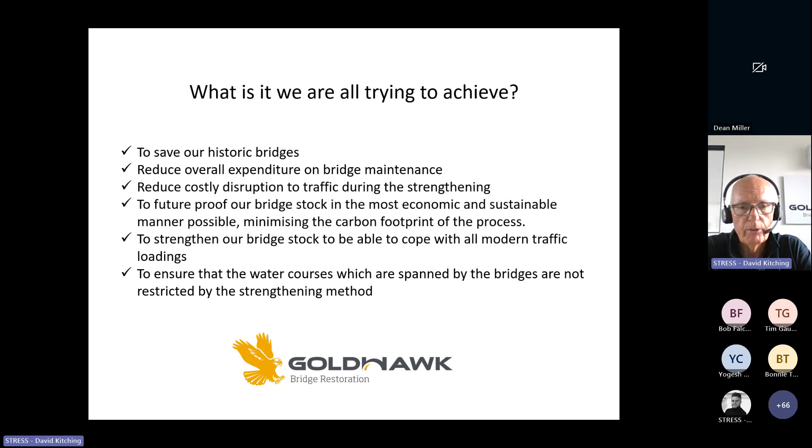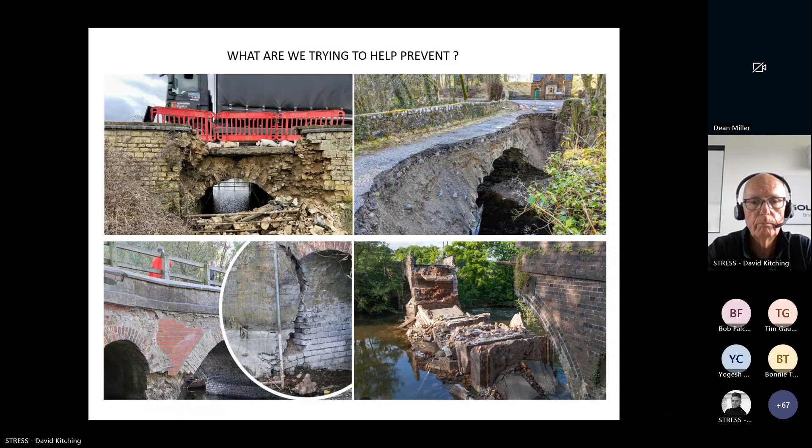With the flooding that we're getting nowadays, the speed of water, quite often we're getting this sort of situation where in fact a bridge is knocked off its feet basically. And getting access to the river for survey is very, very important. Here's some more examples. Well, they're pretty catastrophic. You certainly wouldn't want to be on any of those when they went.

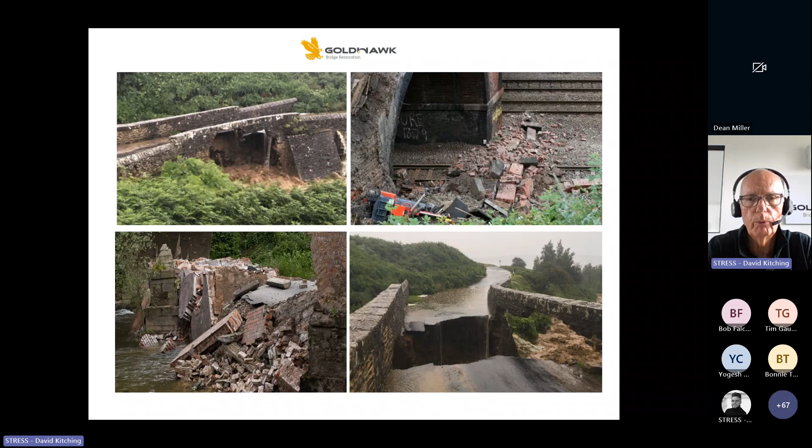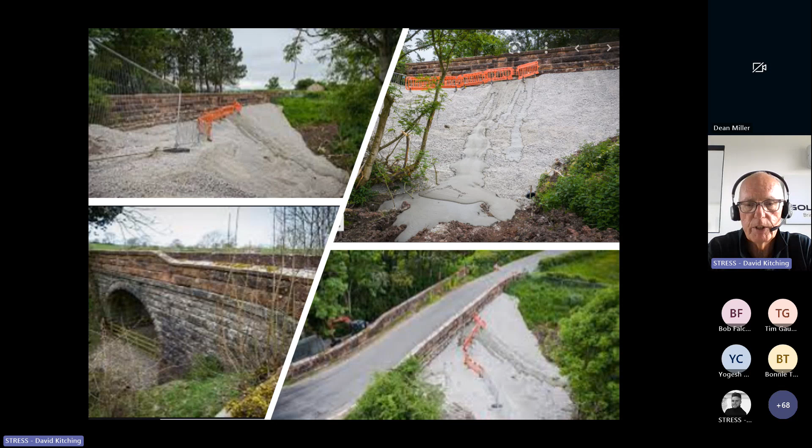So again, this is somewhere where making sure that bridges don't collapse is incredibly important. Probably one of the most uncomfortable things in the headlines recently is doing that - we really want to try and avoid the infilling under bridges rather than strengthening them.

And if we can reduce traffic issues - did you hear on the news this morning that London is top of all capitals in the world as the most congested? I can't believe that, from Bangkok - I don't know if any of you have been to Bangkok. But anyway, it must be per mile or per distance per person or whatever, however they do it. Obviously we all know how irritating it is to sit in queues of traffic.

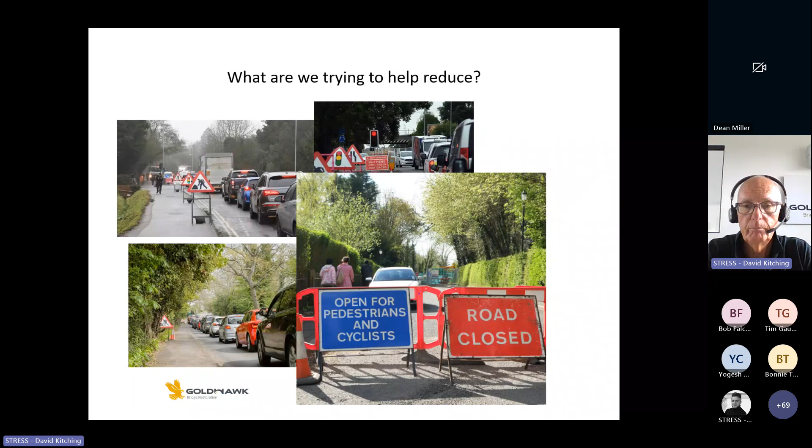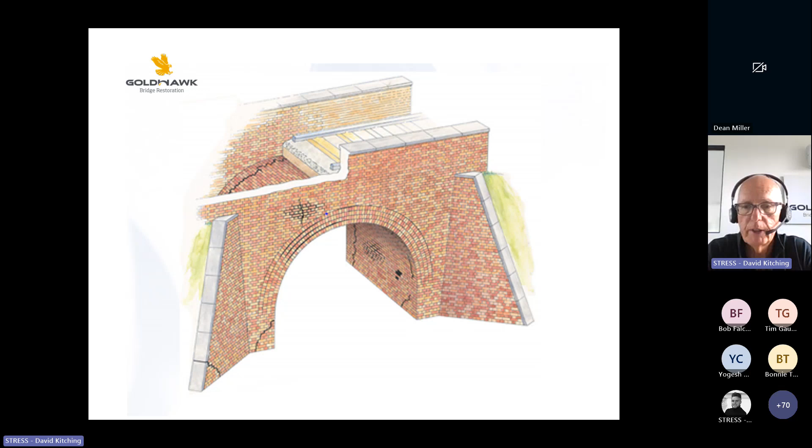So the Mars system is really going to try and bring an arch up to a specified capacity. If you're the client and you want a specified load over the bridge, we will design it to bring it up to that load, or if you want, maximum traffic loading.

Once the Mars system is installed, you've future-proofed the bridge. It will assist in reducing a lot of future maintenance. You've reduced deflection, therefore you're going to get less wear and tear. You've repaired the cracks that are in there at the same time as installing the masonry reinforcement, and you've rebonded the separated ring arches - so you've really rehabilitated the arch as well as strengthened it.

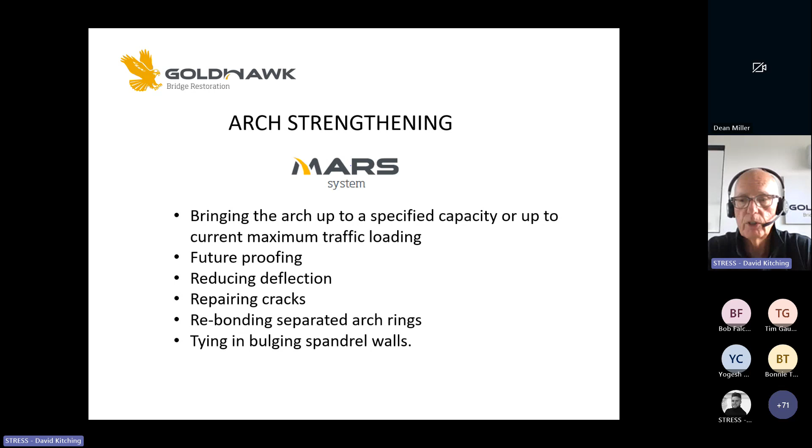And Bob has designed it so that you can take some of the lateral load also at the voussoirs up into the spandrels. It can't go all the way into the spandrels, but certainly that area around the voussoir will assist with any outward load.

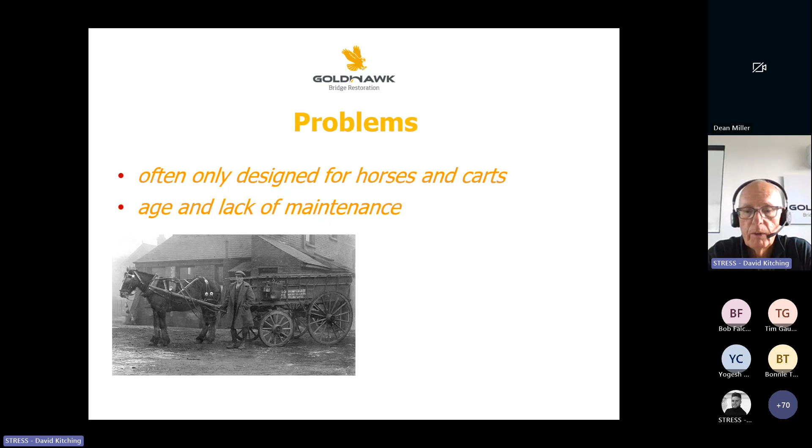So what are the problems really with masonry arch bridges? Well, one of them is that they were designed for much lighter loads - you can see a horse and cart here, very typical of the 1800s and before, with a probable maximum speed of 4 miles an hour and a maximum load of about a ton. And of course, what we're now asking our bridges to take is huge juggernauts and extra-sized lorries - so heavy axle loads, high speeds, and a lot of impact onto the bridge.

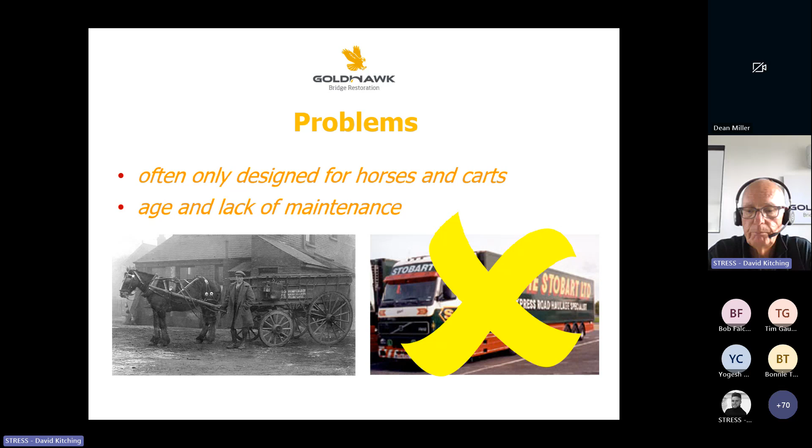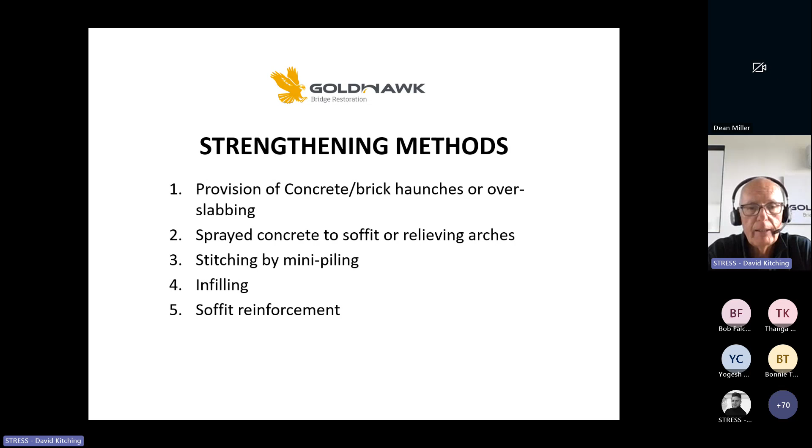So the strengthening methods I'm going to quickly go through are: overslabbing, which is a relatively common method - we've worked on bridges that have been sprayed underneath to increase the thickness of the barrel; stitching by mini piling, which we've never come across although we know it's a technique; infilling, which you saw a photograph of before; and soffit reinforcement.

Overslabbing - very diagrammatic, but that's exactly what it does. You're putting in an RC slab over the top of the bridge from abutment to abutment. I think one of the issues with that is it will tend with time to rot, and then you're going to create issues at the crown, and you'll get an uneven load as vehicles go across it.

And of course, you're going to have to dig the carriageway up to put it in, which means you'll have to close the road, and we looked at all the traffic issues that come with that. If you deload, taking a lot of the fill off, it's possible you might actually have to prop the arch while you do that.

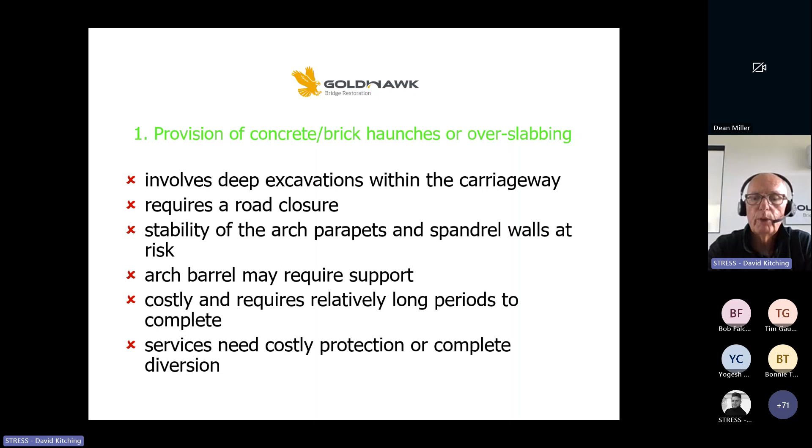It's pretty costly, and of course you need quite a long time to do it. While you're digging the road up, you probably need to dig up all the services and divert them, and I think we all know how difficult it is to get coordination between services and timings, along with the fines that go with it if you interrupt them. So if you can avoid that, it's generally a very good thing.

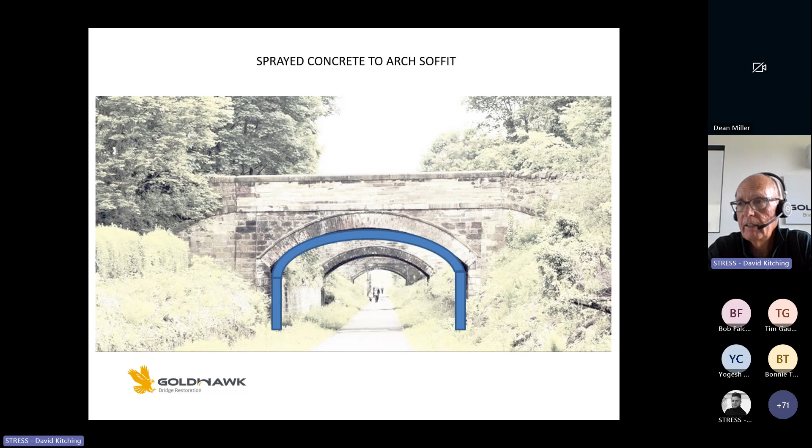Here is spraying on the underside of an arch, in essence to thicken the barrel thickness and increase capacity. But of course, it adds unwanted weight to the structure. In terms of possessions - if you were going over a road or a railway, the possessions to do that would be relatively long. And if it's something like a canal, road bridge, or rail, you've got headroom issues, so if it was electrified there'd be all sorts of problems.

But the big thing about reducing the cross-sectional area is flood prevention, because you're going to get less volume of water through there in flood conditions. One of the things we always look to do is be able to reverse whatever goes into a bridge, but if you put one of these sprayed concrete liners in, you'll never get it out without destroying the barrel, because it will always be harder than the barrel itself. You've created something which is relatively impermeable, so water will tend to be stored in the arch itself and the fill above it.

And as Bob has mentioned - I don't know if he mentioned it in the last lecture, but he has certainly mentioned to us - you get from traffic going across the bridge a huge increase in hydraulic pressure if you've got trapped water in the bridge, and that really doesn't do anything any good.

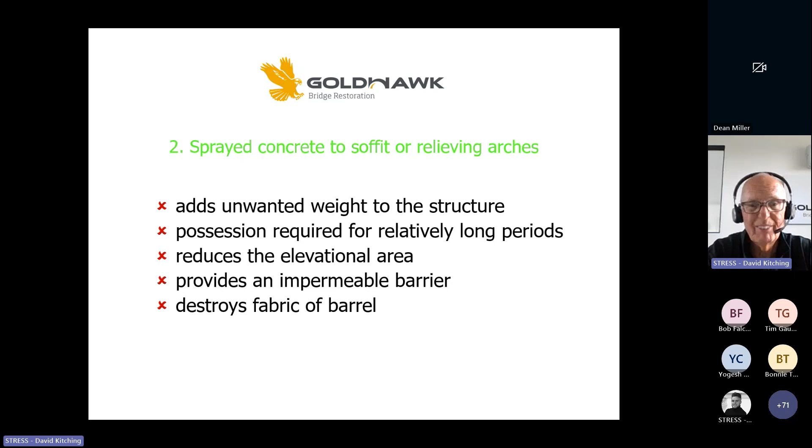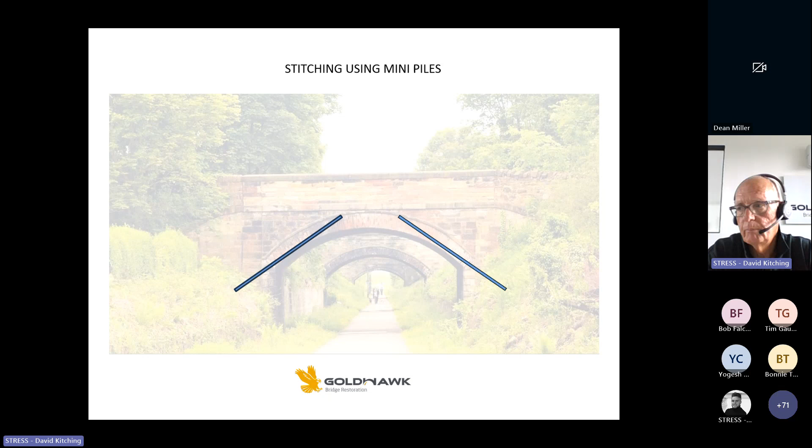Pin piling, something like that, or pin stitching - never seen it, but I have heard it's been done, and you can see how close to the arch it has to go to do its job. Basically, it's taking load from near the center of the bridge, near the crown, and distributing it down into the abutments.

But it only strengthens for that one particular critical load case. And because of its location within the arch, it alters the response, and you lose that natural flexibility of the arch, which is incredibly important.

You're going to end up concentrating stresses right at the edge of the arch, roughly at those third points, and you can permanently damage the arch by doing that. And of course, then you get ring separation, etc.

You've still got to close the road because you're going to have to drill these things in incredibly accurately. I don't know how they were ever done. You've probably then got to divert services as well. So you've got all the same problems you've got really with overslabbing.

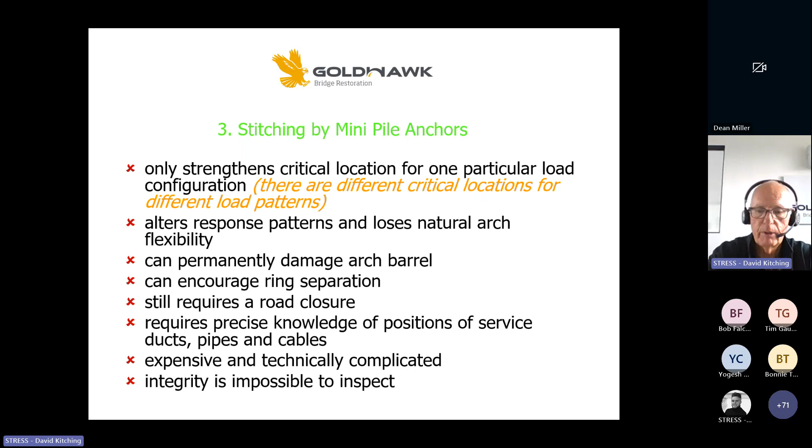We understand it's expensive and technically complicated. And once it's in, you can never inspect it. These things are too deeply buried to know whether you've got corrosion, breakdown of the grout. So there are a number of disadvantages for it.

Well, what do we say about this? Yeah, it's not going down too well with people, is it? So we know it's costly. We've actually bid for that bridge, funnily enough, and we know our costs were significantly lower than infilling it with concrete. And now that they've lost the appeal for planning, they're having to break it all back out.

But it's an environmental and visual disaster. Imagine the flora and fauna that used that area to run through safely. They certainly can't now. You've permanently damaged the barrel if you were ever to try and take it out.

Massive carbon footprint with all that concrete in it. And yeah, you've got all the disposal costs of the arisings. So I think it's not going to get much more favour as we go forward in the future.

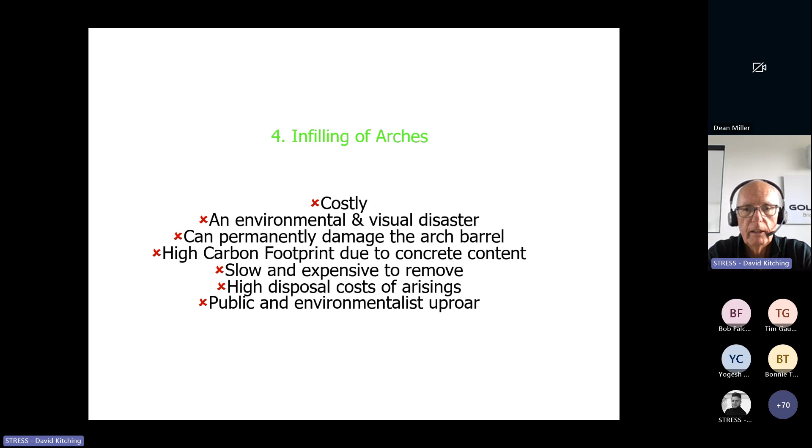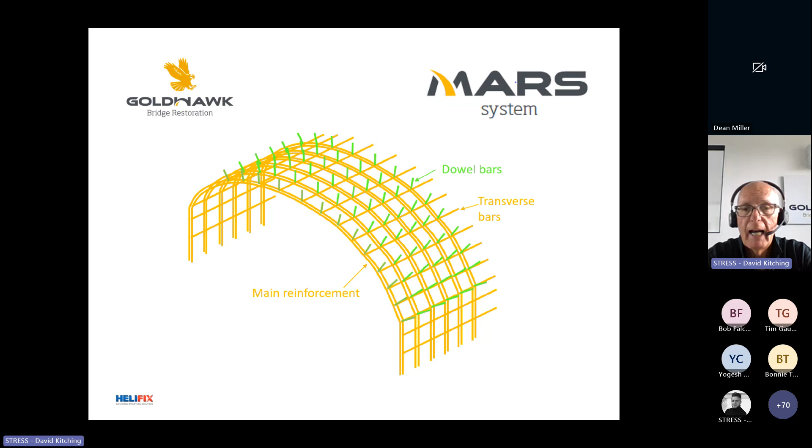So we'll come to our fifth one, which is masonry reinforcement, an elegant solution. Bob will have shown you our graphic of the Mars system, showing its elements. There's basically three: the circumferential bars, the longitudinal or lateral bars - transverse, I think we should probably call them - and the dowel bars or radial ties.

So if we think about the system now, you've seen what it looks like graphically. I'm going to show you in more detail what it looks like in situ. Let's have a look at some of the comparisons that we get.

We don't add weight to the structure because the bars and the grout combined are probably slightly less than the small amount of stonework or brickwork that we actually remove. We don't reduce the elevational area, so there's no issues when it comes down to the Environment Agency.

You don't really significantly change the appearance of the structure, and you will see this, and you probably saw it from some of Bob's case histories. And usually we don't require a road closure, so we can install this whilst the traffic or rail traffic pass over the top of the bridge.

It's durable. We've got stainless steel and a type of epoxy, a hybrid type of epoxy adhesive that surrounds the resin, bonds it into the bridge, and prevents weathering and rusting. It preserves the inherent flexibility of the arches.

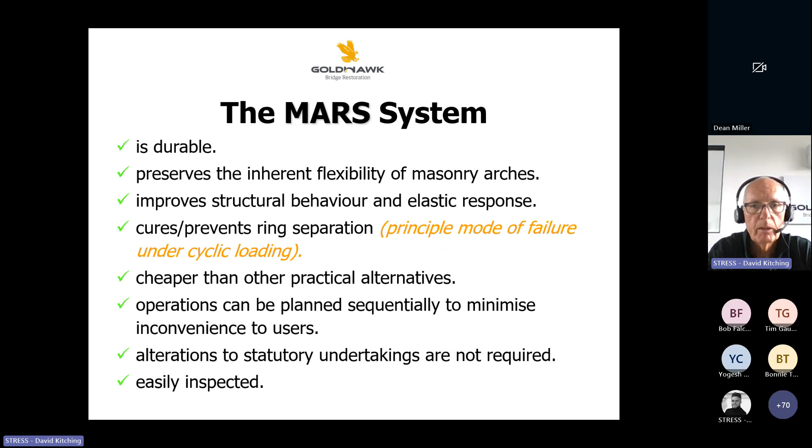So a little recap for those who didn't hear part one.

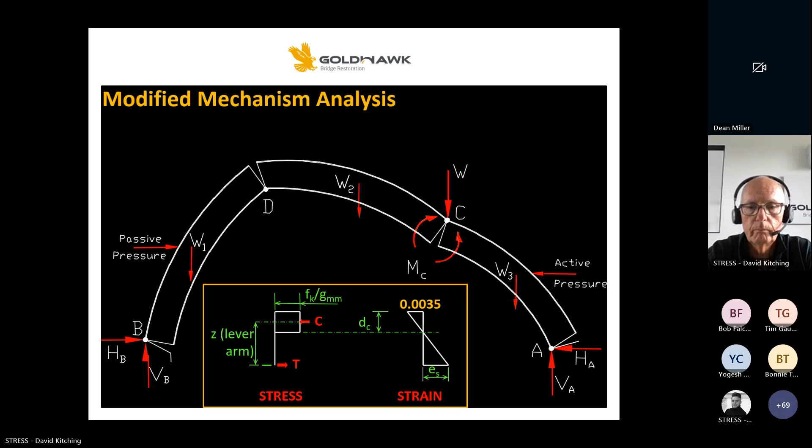And here's this in practical form. These were full-scale bridges, a series of them that were put to failure, taken to failure by TRL, and the behavior and estimated capacities gave the guys doing it at the time the ability to look at programs for assessment of existing arches.

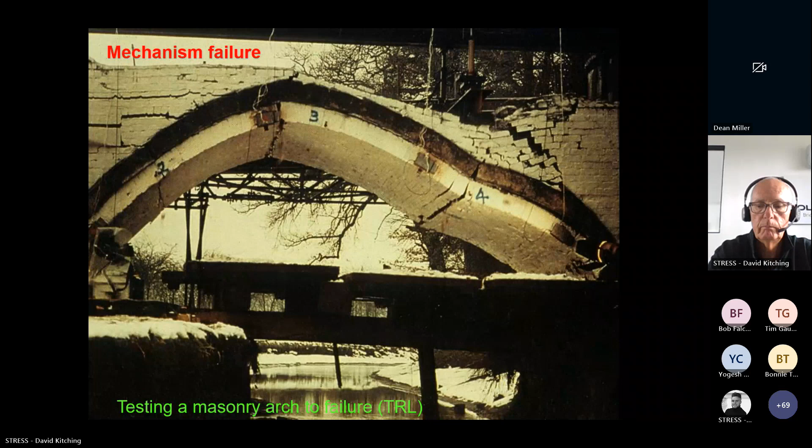I think Bob will have probably showed you something similar to this, if not this particular slide, showing the Helibar as we're using it in this case in both directions. This is something we do very rarely, which is 3 bars. It's very complicated, quite technically difficult to install, and normally not necessary, so we'll try not to. But this basically just shows you 3 circumferential bars, a single transverse bar, and the hooked radial tie.

You'll see the size of the slot. Maximum size of slot we ever put in is about 50 millimeters. Generally, it's around 35.

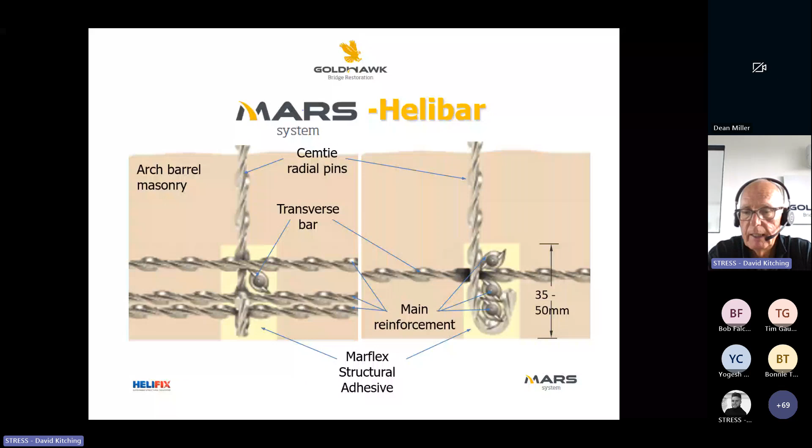So let's look at some of the practical aspects of installation. Access is critical. You've got to be able to get down under the bridge and access the arch itself. We'll show you how we cut the slots, drilling of the radial ties, preparation for inspection. This is incredibly important - it's quality control. And then we'll show you the fitting of the stainless steel and the bonding of that steel into the masonry.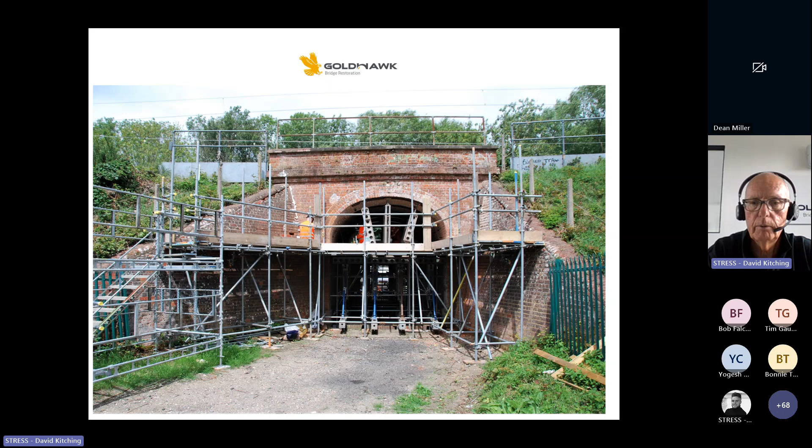So here we are with the cutting. This tool was, I think, invented by Hilti a long time ago, 25 years ago I think. Mainly it was used for electricians and plumbers to be able to chase into blockwork and create channels so they could put in pipes and cables.

I don't know how many of you have been to site. We've been even on network rail jobs, and there's a guy with an angle grinder and a mask and a pair of goggles in a cloud of dust, trying to grind out bed joints with a mortar raking blade. Those days have gone.

When we actually show them how fast they can remove mortar with this, they just pack in completely and buy one of these things. It cuts a very accurate slot, any width you want, any depth up to 45 millimeters, very accurate. Literally, you can adjust that within a millimeter. And as you can see, it makes a very, very clean cut.

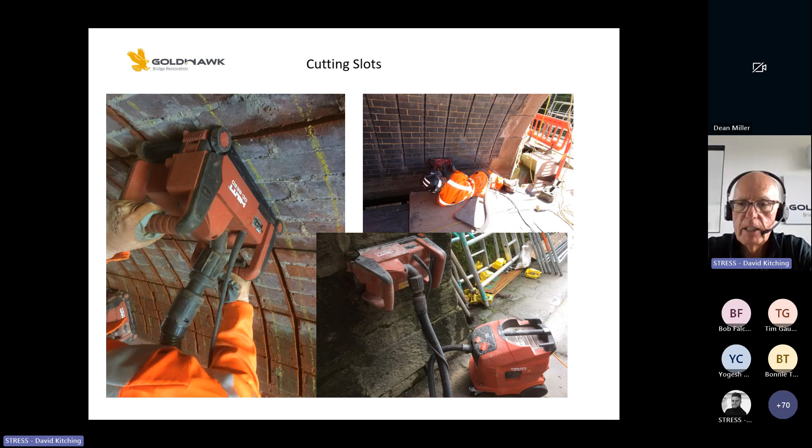And if we look back at that network rail arch, that actually was an elliptical arch. In fact, there were 3 ellipses in there, so you actually have a change in radius as you come around the arch. Well, if you had to buy tracks of a specific radius for your bridge, you couldn't then keep moving them around to take the track round. So in fact, it just becomes impractical to do it. And this is without doubt the best way of doing it.

So here we are. This is a bridge for Oxfordshire. And again, just cutting into stonework.

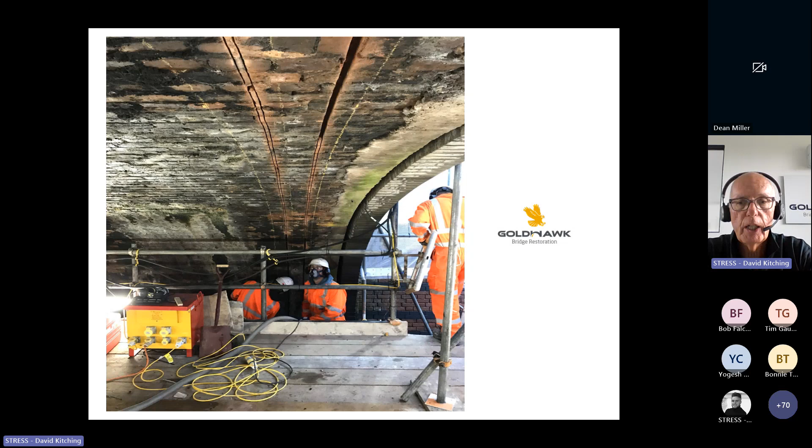This is the bridge in Birmingham at Broad Street, and you can see there that the blades are twin blades, and they leave what we call a little biscuit in between, which very easily snaps out, and then we check it for depth. So you get that very accurate cut.

This was at Newcastle Station, beneath the old station, not used for rail tracks anymore, but with some rather strange movement in it. Bob designed a system to reduce the risk of further damage. You can see where all the bricks have been replaced, actually compressed into position with wedges while the grout went off to get compression back into the bottom ring. And we're just completing the cutting there.

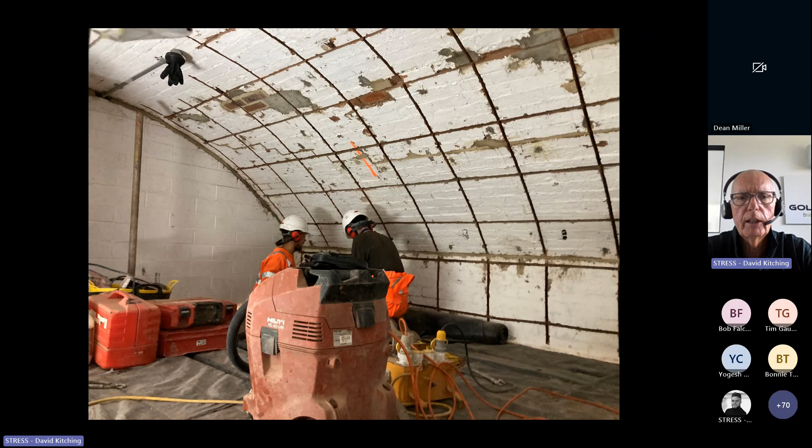Radial tie drilling. Now, for those of you who've dealt with the Environment Agency, one of the restrictions they impose is making sure you don't contaminate the waterway. So you can probably see you have to have a little bit of tolerance between the edge of the pontoon and the arch to allow for height movement.

And pontoons don't come exactly the same size as any arch. So even though you make them up of modules, you will get to within a certain size, and you're normally within about 300 mil of the edge. So any dust that we create, if it drops into the river, we're contravening our permit. So we use vacuum recovery even on our drills.

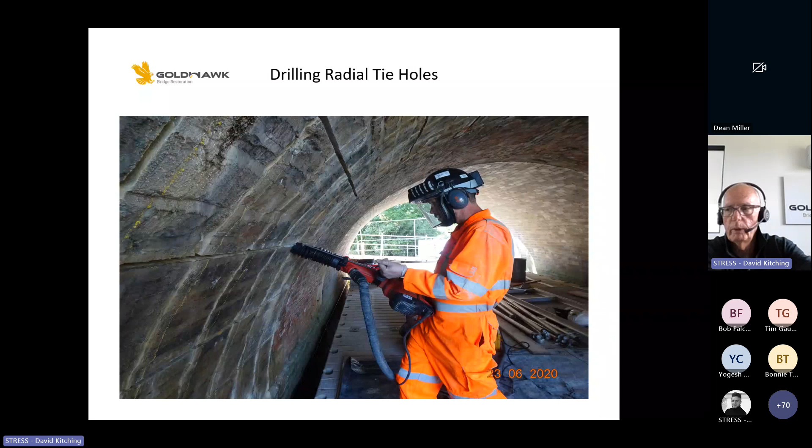This was actually taken, I think Bob said last time, during COVID. We were working on the bridge during COVID, and because we had those ventilated masks, we could work as a team. So in fact, we were back to work within 6 weeks of the shutdown.

Clean and tidy. Well, you've seen that we use vacuum recovery all the time, but it doesn't mean that there aren't bits and pieces that fall, bits of mortar drop out, bits of brick. And also, as you saw, that little biscuit can often be left between the 2 blades and has to be snapped out.

So you put polythene down over the pontoon or your decking, and at the end of the day, you remove everything and you roll it up, you take it up to the skip and you shake it out, and then bring it back to site the following day. There's no need to use new polythene all the time, and it just prevents any particles getting into the waterways.

So quality control, incredibly important. I mean, if you think about it, we are bonding reinforcement into masonry. It's got to stick, and the stresses from the masonry have to be distributed into the steelwork. So the cleanliness of those slots, the accuracy and cleanliness, is paramount.

So when they're cut, each one is checked for depth with a depth gauge for that particular design throughout. It goes right the way around, and we mark the soffit with any areas that don't meet specification, and they have to then be ground out.

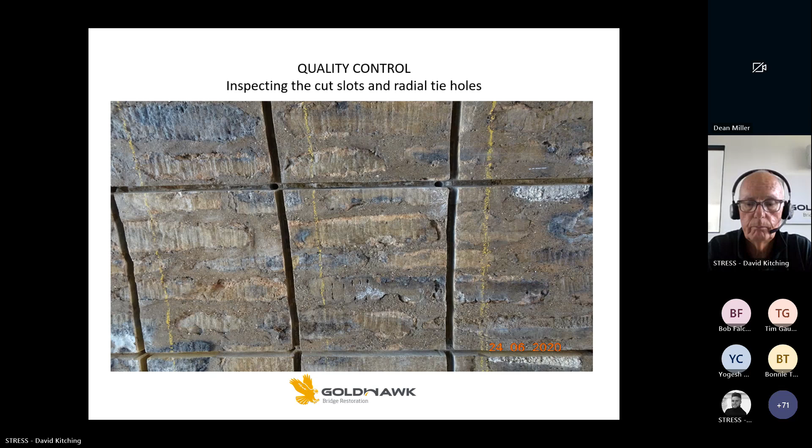Here we see some brickwork. This is a project that we're working on currently down in Cardiff for Network Rail. And again, you will see that just incredible cleanliness of the cut, which is really, really important.

What you also see there is the fixing mechanism that we've got at the moment, which is a series of cable ties, giving you a very accurate fixing, and those are into plugs that sit at the right depth so that the bar is tight against the plug, but gives a minimum 3mm gap at the back of the bar into which we need to get the Marflex, and holds the bar right in the center of the slot - which again is one of the quality control issues that we have to overcome.

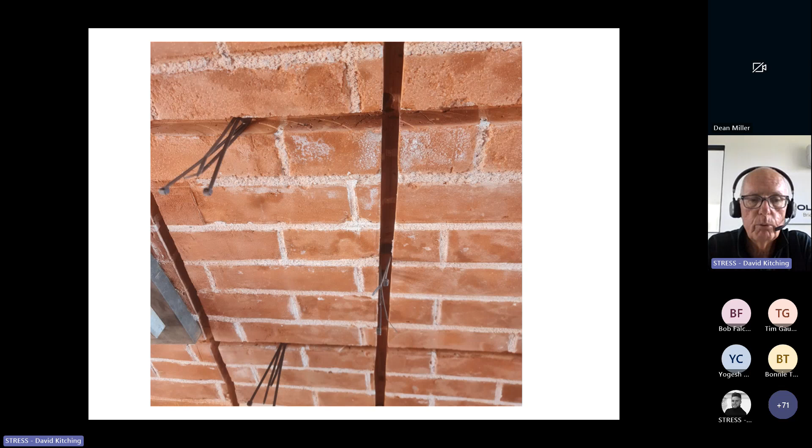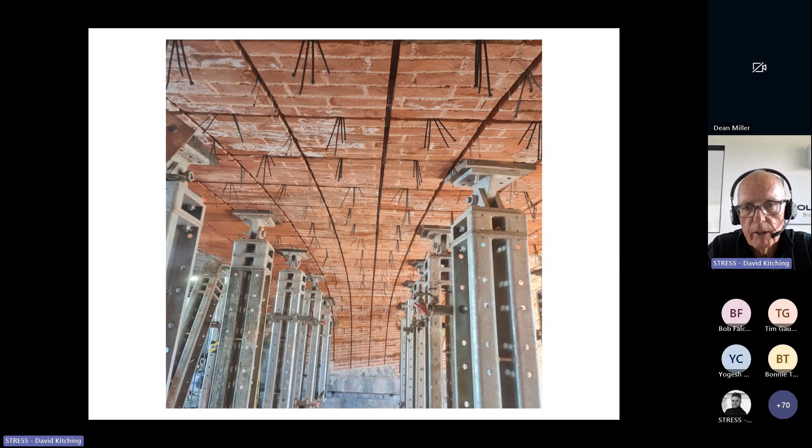More examples. We're actually not ready for fitting of bar. Well, we are on part of the structure at the moment, but we're waiting for clearance from Network Rail on something else, and so we're working on making sure that everything is super clean and tidy at the moment before we start fitting steel. But I will show you some steel on that.

So when it comes down to fitting the bar, it's relatively straightforward - it's the fixing of it which is more difficult. So the bars come round into the abutments and generally go at least half a meter down into the abutments and are anchored there.

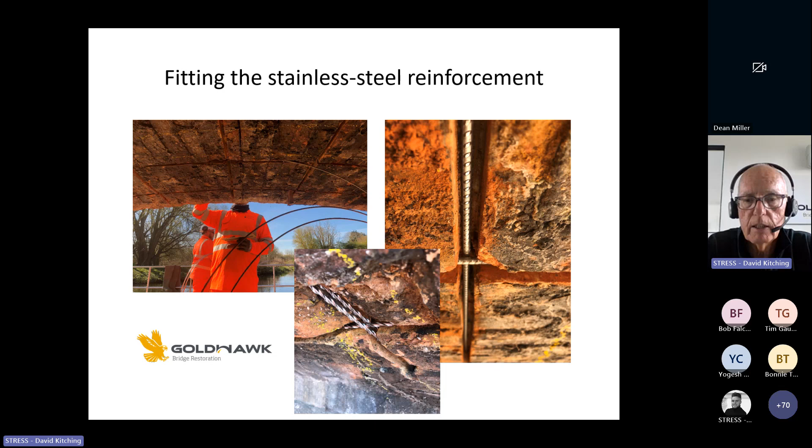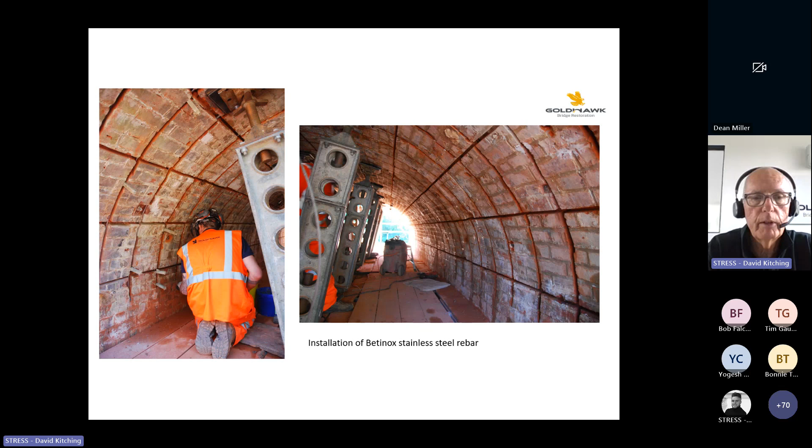We then run the first circumferential bar round before then fitting the transverse bars, and then the second circumferential bar is fitted into the slot in this particular case. That's the rail bridge for Network Rail that you saw there with the bar being fitted. And here's some examples of bars in situ, ready for inspection.

I don't think there's much more to say about that. This is actually Betinox bar, also made by Helifix - we get it through Helifix, and it's a stainless steel ribbed bar. It's got a higher tensile capacity, and we use up to 8 millimeters in diameter of this material. On bigger bridges, you have to have a fairly wide radius to make this fit properly. Then you can see the radial tie hooking around it.

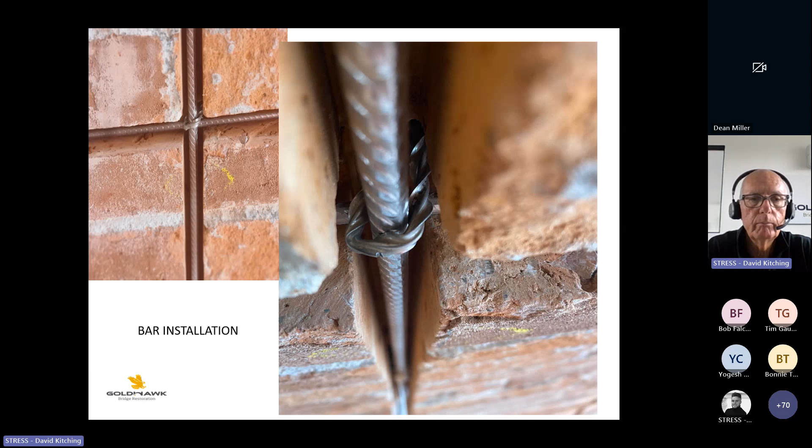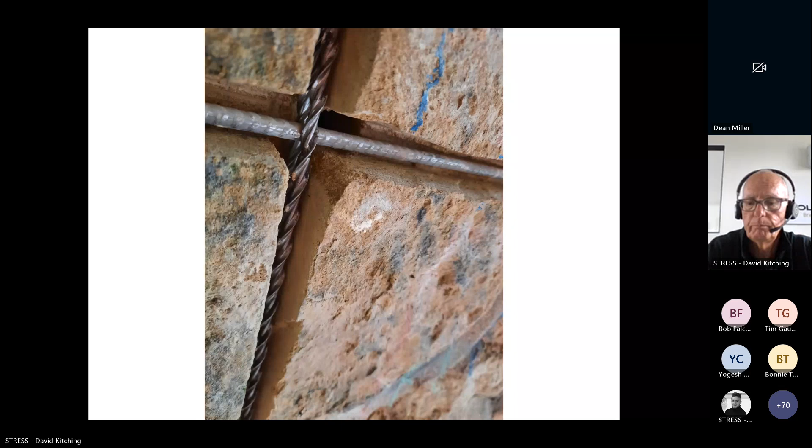Here's some more. This is where we've got a mixture of lateral or transverse Betinox bar and circumferential Helibar Super 6. Now the Super 6 is like 6 millimeter Helibar, except the core is a greater diameter, so they are stiffer with a higher capacity, but still in relative terms very flexible.

So now we come on to the quality control. When we get to a position where we're ready to look at the fitting of the reinforcement, we look at absolutely everything. Is the bar actually going to stick over the surface? Because if it is, it's not going to be protected. So we need to look at exactly where it is in the slot.

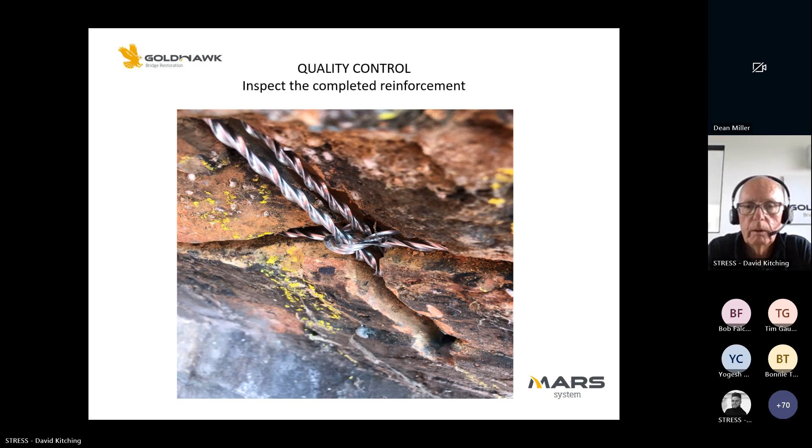I pulled up 3 slides here. Now, from what I've told you already, would you say any of those 3 examples are ready for grouting, ready for popping the Helibar, the Marflex, into the slot and bonding it in? It's a rhetorical question really, but the answer is no, they're definitely not.

I think you can see top left that the transverse bar is tight against one side of the slot. That's no good because you're not going to get a full coverage of Marflex. Bottom left, exactly the same thing. You've got that transverse bar sitting tight against the side of it. So we'll check for depth, gaps, and tightness to the slot.

Top right, that's something different. That is the Helibond grout that's been used to bond the radial tie into the arch, and it spilled out because there was too much put in. As you push the bar in, it pushed the grout out, it was left, and of course you're not going to be able to get Marflex grout over that and protect the bar. So that's got to be chopped out.

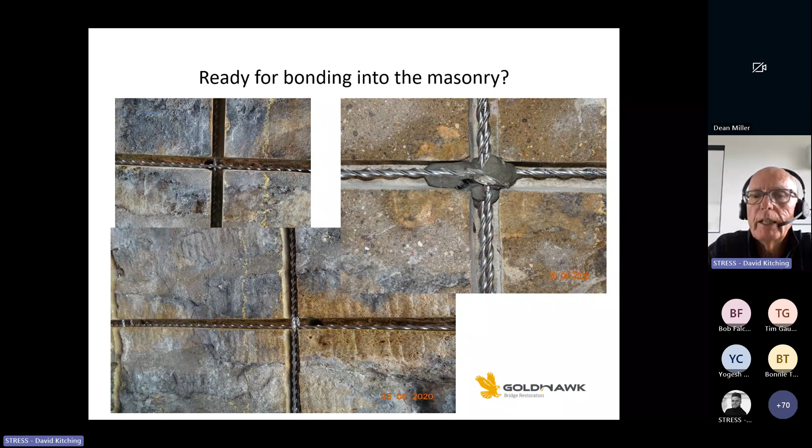So we look at all these aspects until we get something like this. We want to see those bars with spaces around them, equally spaced between the slot, and not proud over the surface so that they can be protected. And that is ready for Marflexing.

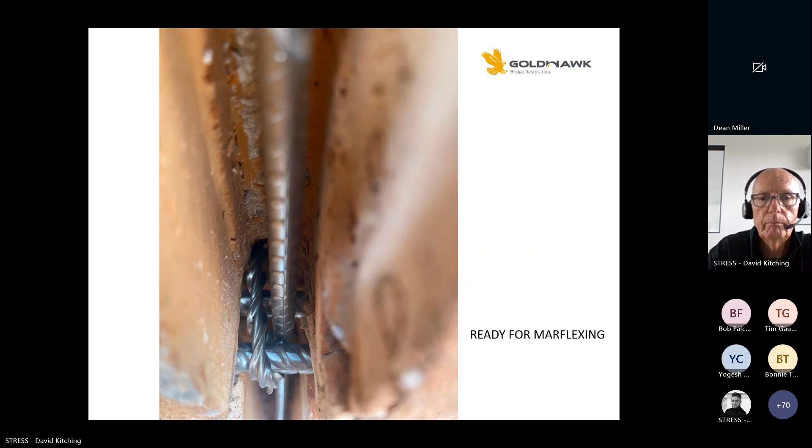So when it comes down to bonding into the masonry, this is probably the trickiest part of the whole journey. Marflex is a product made specifically for this purpose. It's a high strength epoxy with flexibility, and it's moisture tolerant, which is probably one of the most important things, because I don't think we've ever worked on an arch that's absolutely dry. It's always got dampness somewhere, because of course you've got precipitation onto the road or rails above. They're not designed to be waterproof, and so the masonry arch itself is always damp. So whatever we use has to be moisture tolerant and has to stick to a damp substrate.

It's probably one of the stickiest things on the planet. If you go to site, we'll give you a set of overalls to wear as you go onto the pontoon. You probably won't go within 6 feet of the adhesive, but I guarantee you'll take some back with you because it'll be on your boot, or somehow you've got it on your elbow or your collar or even in your hair.

It's remarkable stuff, and its pot life is relatively short, so we knock it up in 10 kilo batches. It gets loaded into cartridges, and then it's actually gunned into position, very much as you would have a skeleton gun. We use pneumatics to drive the guns, but in essence that is the most effective way we have ever found of delivering it. It's controllable, and you don't throw expensive bits of equipment into the skip at the end of the day because you can't clean them properly.

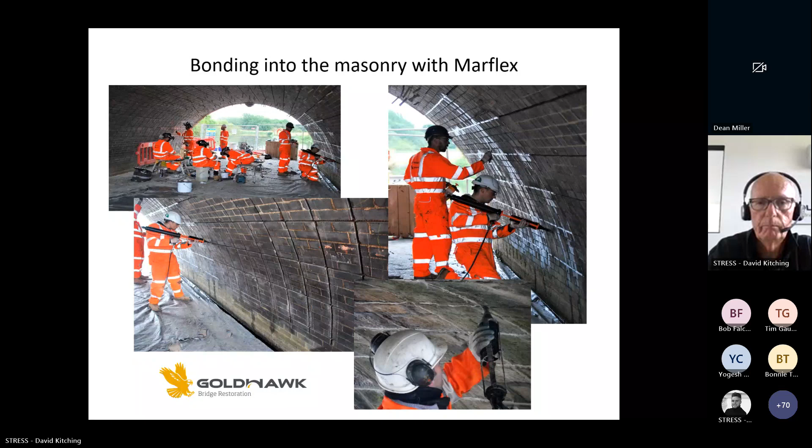What do finished arches look like? Well, there's a lot of hoo-ha about cutting into arches, particularly historic ones, which this is. This is part of a listed viaduct in Northampton, Oundle North Viaduct. We had to deal with the heritage officer for Northampton, who didn't like the idea at all. We did trial panels for him and showed him the colour. He agreed that would probably be all right, but came to site when we finished and was utterly delighted.

You can see the history of the arch. Yes, it's been strengthened, but you can see where it's been strengthened. If you go into a museum, for instance, and see a repair to a statue, the marble is sort of brownish, it will have a white arm on it. Well, that is all part of heritage repair. You show what's been done. You don't try and hide it, and you don't try and make it too obvious.

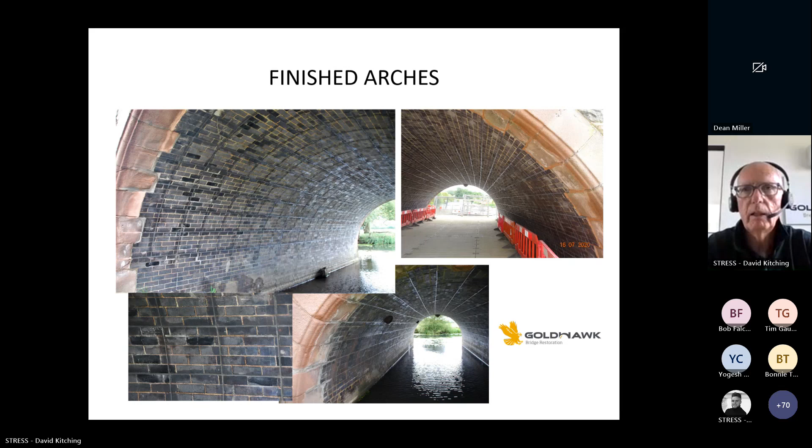So here we've got the Marflex grout adhesive in grey, and it's not a bad match. But could anybody tell me what colour grey we should use? Bottom left, how many different shades of grey have we got there just in one panel of brickwork? So this is the problem. If you go under a bridge and try to colour match things, there is no single answer. You will have 21 different shades of stonework or brickwork within a square metre. So you can't necessarily hide it, you just make it look as appealing as possible.

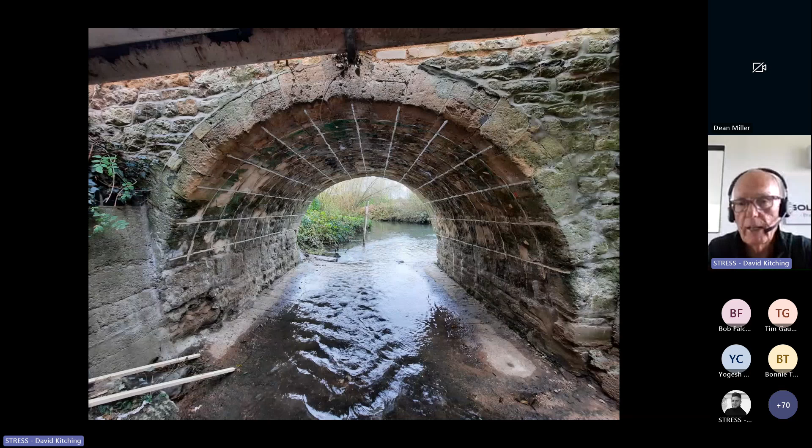And I think you can see here that's not too bad. This is that arch you saw for Oxfordshire and Milestone, where we had just the trestles. You can put trestles down on that, and that's what that arch looks like. A fairly random size stone arch, but again, it's fairly neat. And of course, you can imagine floodwaters going through there - they've got no restriction and no problem. I'll come to floods in a minute. And there's the main arch in that particular structure, all very neat and tidy.

And although that was what we call buff, with a general colour of sandstone I guess, it's got lichen on it - some's green, some's black, some's much paler. There's render repairs in there, all sorts of bits and pieces. So you can never be exactly colour matched. And that's the bridge finished. So again, it's repaired, but you don't really notice it unless you actually go under there, and most people would canoe through and not even notice that it's been strengthened.

And about a week before we were due to start, we were refused access to the canal, saying no, they didn't want their bridge strengthened. So it was at that point that we had to point out to them, in fact, it wasn't their bridge, it belonged to Calderdale Council, and they did want it strengthened. But we'd missed that window, because you can shut a canal for a certain period over the winter when it's not being used, but it still has to remain open for maintenance. In fact, we had to postpone the project for a year and come back the following year. But that bridge was taken from, I think it was about a 5-ton weight limit, to a 40-ton capacity in 6 weeks.

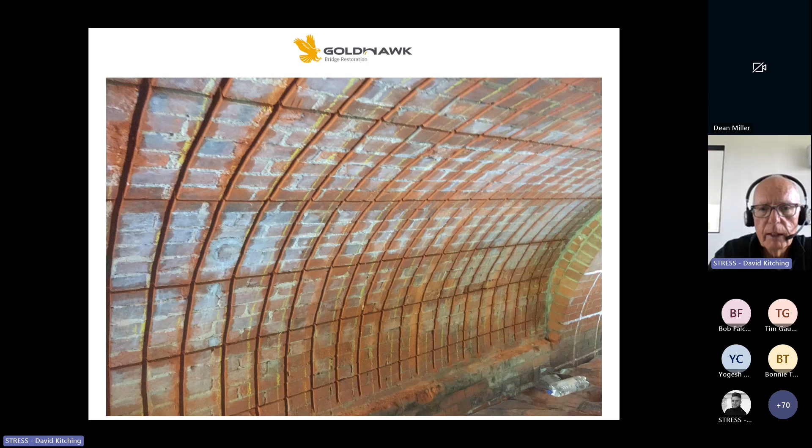And in fact, if we go back - I don't think I need to go back too far, going the wrong way. There - can you see that is that same arch? And just to the right there, you've got the next arch, the middle arch, which has got a different pattern of Mars strengthening. So I think the tightness of the circumferential bars here was about 130, which is probably one of the tightest we've done, whereas you're getting on for nearly 450 on the other arch. So you only put as much reinforcement in as is necessary to strengthen the arch.

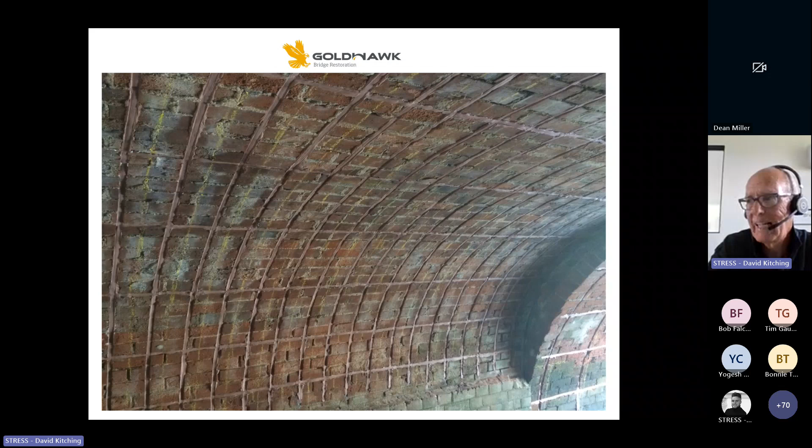So culverts, tight little culverts - as long as you can get in there and work safely, then it's doable. And that's it finished, so again you see all very neat and tidy, and you're preventing - if there are any cracks that had been in that arch, and we come across quite a few cracks that run around the arches - you've got reinforcement now bridging those cracks and helping prevent future cracking.

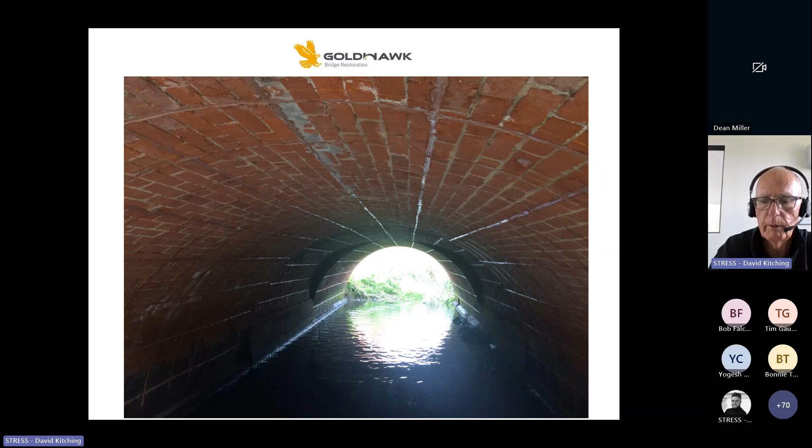Another little one we did for Hampshire and Skanska - I think they're milestone as well now. This was a small twin arch bridge that had got scour damage as well as under capacity of the arch. As you can see, fairly shallow, very little fill over the top of the arch. That's a 2-ring arch, and they wanted that beefed up, I believe, to 40 tons again.

So we set about it and then found that the central pier was not in a very good condition. There'd been a lot of repairs, poor repairs done in the past, and scour action had caused a lot of damage to the brickwork. So part of the job was to replace those bricks, semi-engineering bricks. As you can see here again, Bob has designed the reinforcement to come down into the pier and provide additional stiffness.

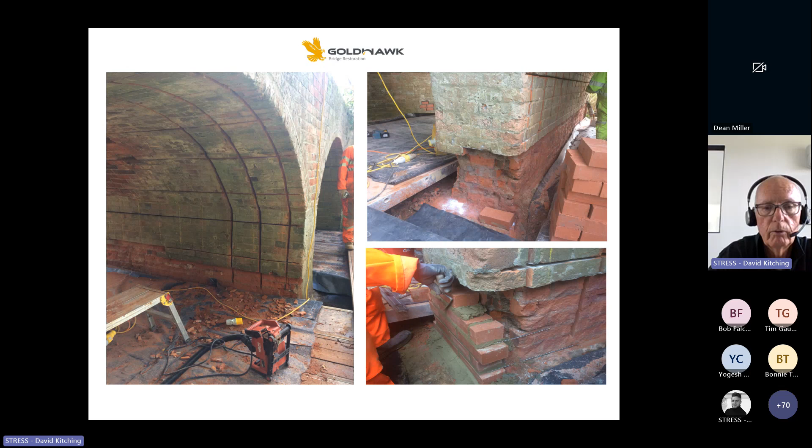It's a good example of the bottom left, actually, of the cutter with all the little brick slips that have come out. Again, nicely contained on polythene, which can then be just rolled up and taken off site. But we've never had the EA ever come down and criticise us for anything, which is lovely.

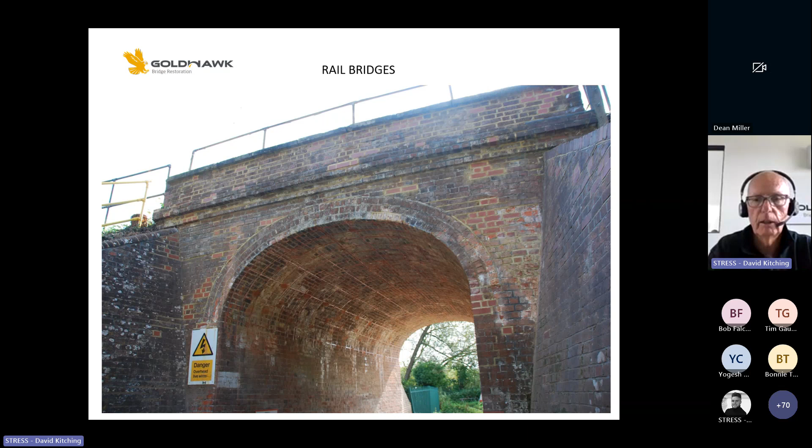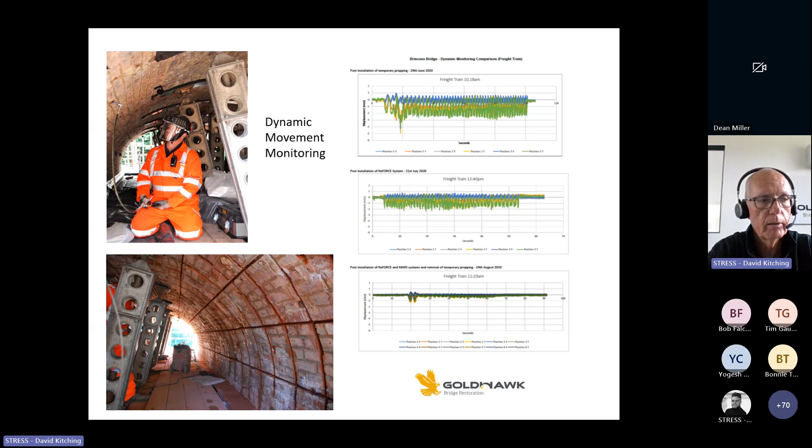So you've got that top trace, dynamic trace, showing the movement in the arch. Once we'd done the stiffening, it was less than half, and then the installation of the MARS system then reduced that to a point where Network Rail were perfectly happy, and it got its route availability 10 category. That was that one finished.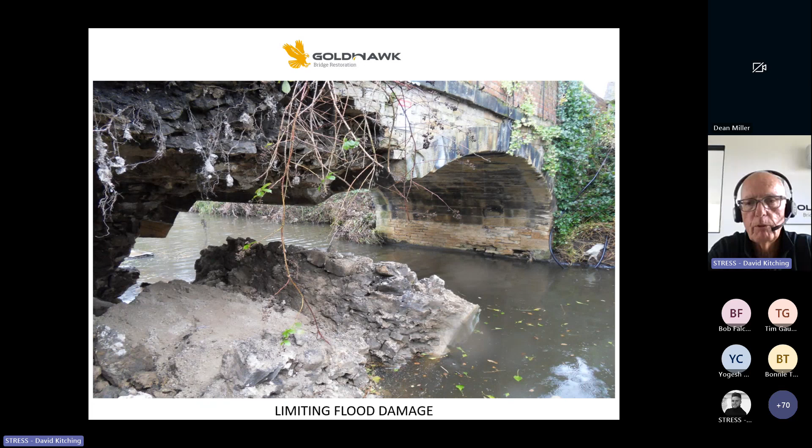It wasn't a listed bridge, it wasn't of great importance, and we couldn't get any heavy equipment to this side of the bridge because the only access was from the far side, from the main road. To be able to do anything with that, we'd need piling rigs to put down some decent footing. So repairing it with the Mars system really wasn't on, but it just shows you what can happen with scour.

As you can see here, this is Tadcaster, and a bridge that collapsed during flooding. Again, scour that took that out. And we can see here another example of a bridge that has been widened. So we've got two ages of bridge there, although they followed the same pattern. And funnily enough, it was the old bridge that stood firm and the new part that collapsed.

We were looking to use the same injection system that we used at Briscoe's bridge for the Network Rail bridge, for stiffening the haunches. We were actually going to stiffen the alluvium beneath the new pier, but we looked at it and we didn't particularly like the consistency of that alluvium, and it was too much of a risk to take. So in fact, we didn't do it. That was a Balfour Beatty job at the end of the day.

This was an interesting one. We were called in by Bam Nuttall, actually - Linton Bridge over the Wharfe, and they had water flowing through there during those floods nearly up to the crown of that bridge.

And what happened overnight was that someone reported that they thought the pier in the center had dropped. And we were called up to have a look at it. Now, I didn't believe it had dropped. You can have a look at what it looks like. And so they shut the road.

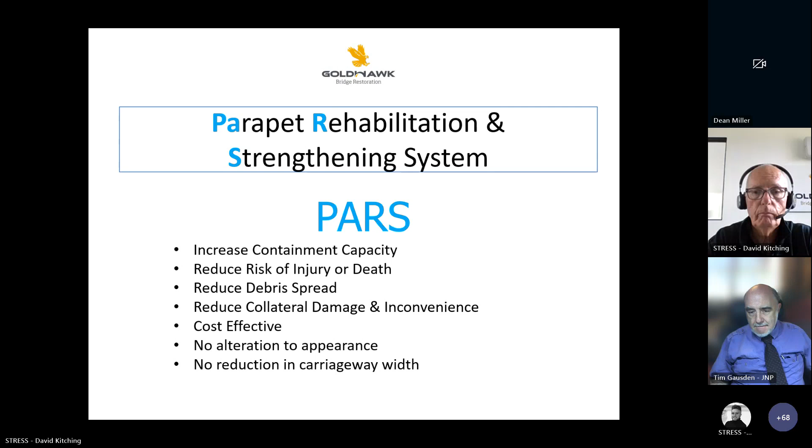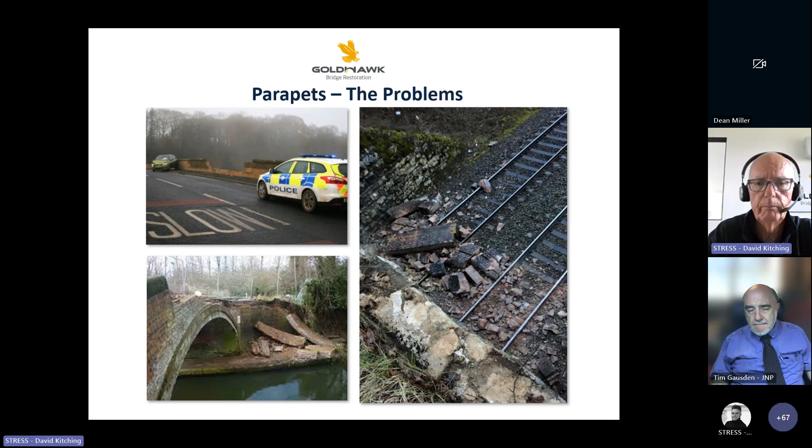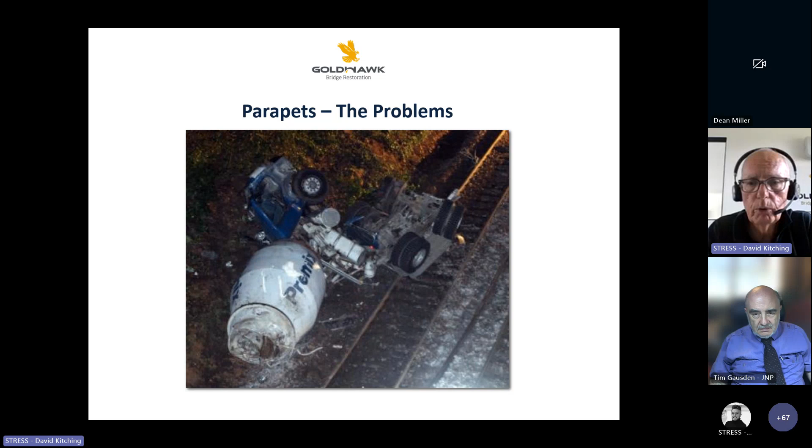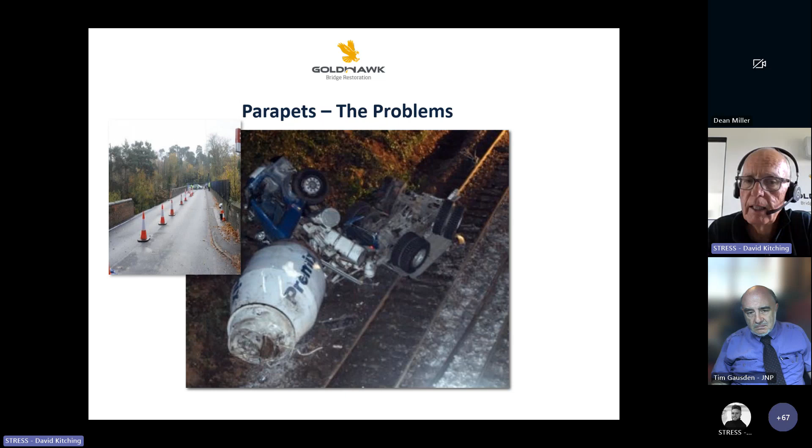Here's Eddie Stobart again - didn't quite make it across that bridge. This was one here in Surrey - you can see a cement mixer had made it down off the road onto the trackside. Quite a mess. I don't think anybody died - I think this was remarkable, but the lorry driver walked away from that. You can see the parapet he took out, incredibly thin. So again, one of the problems is, had we repaired that and tied it all together, and he'd taken part of it out, would it have pulled the whole of the parapet down instead of part of it? So these are all things to consider when it comes down to it.

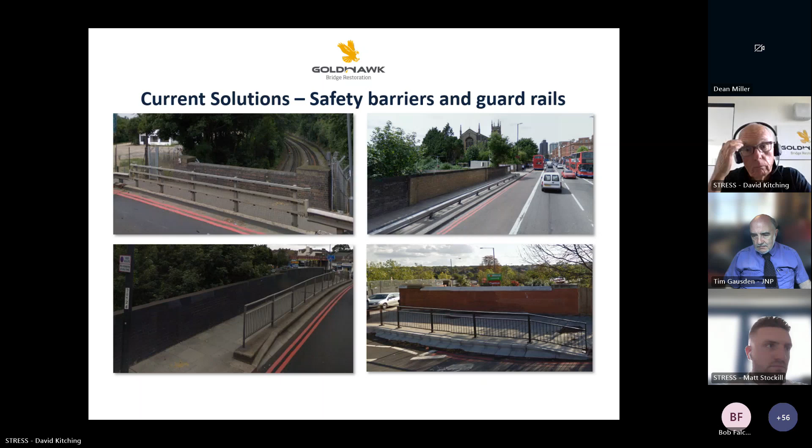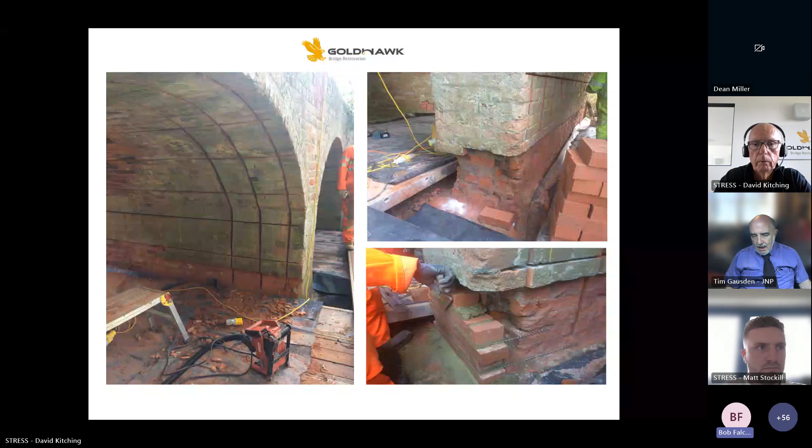Sorry, I mentioned the abutments - you had a slide there with the abutments, with reinforcement in the faces. Oh I see, yeah, that's the one that Dave showed. They were false abutments, and they were actually acting as a pivot for the barrel. It's a bit difficult to explain, but they were false abutments, and we tied the abutments back into the bridge, if you see what I mean.

There was a barrel that had been constructed wider than the waterway, and someone had come along in the past and narrowed the gap, if you like. It would have been nice to take that part out and redo the whole barrel, but it was just too expensive and not worth doing. So this was this little one, yeah, wasn't it? Yeah, that's it - it was quite unusual, so they are false abutments.

They were added later, and there's no point in taking them out, because it had been strengthened by an infill steel bed - bridging - and that destroyed the barrel, so we took that out. The barrel was in terrible condition above, and it wasn't the easiest job in the world, was it? Certainly wasn't. Bring it all back, but they've made a fantastic job of that.

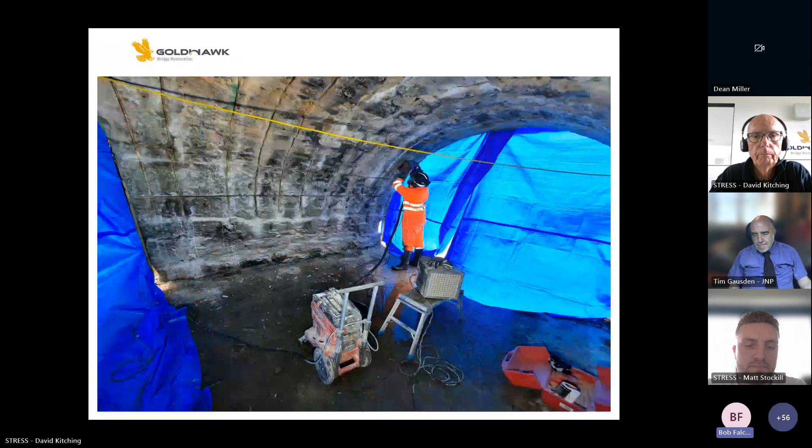So the longitudinal bars in the soffit, on the barrel soffit, where do they go? Where are they anchored actually - the circumferential bars? Well yes, if you remember that diagram Dave showed initially, the critical location for all sorts of loads tends to occur in the middle third of the span. So we take the bars back to the springing, and that gives you sufficient anchorage for the bars.

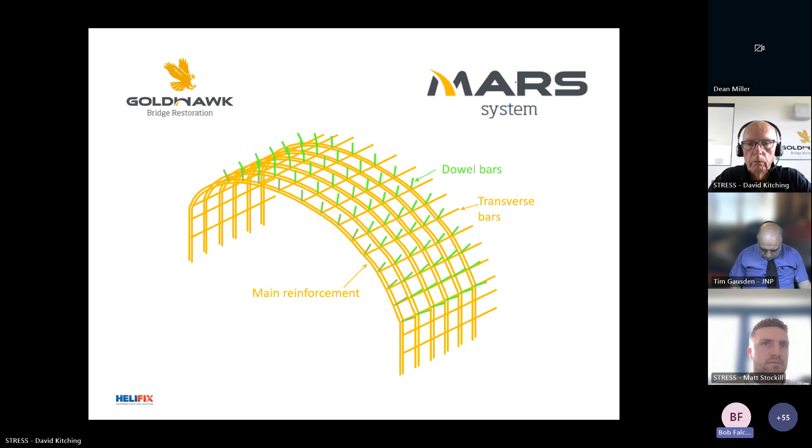So the springing there would be set back, wouldn't it, from the face, if that's a false abutment? Yeah, I mean, we've got a case at the moment where we're having to recase a number of parts of the bottom ring of brickwork, and when you recase, there's no stress in those bars, so we have to take our anchorage further into the abutment than we normally do. But really, the bars are only required in the middle third, and the rest is anchorage - we only need about 600 mil for anchorage to get the full strength of the bar, so we have adequate anchorage as it goes from the middle third to the springing.

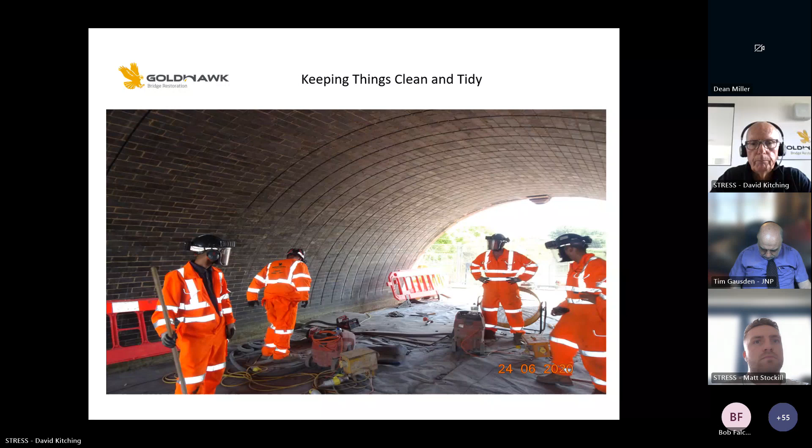Did just have two more questions pop in. So Waleed, for clarification, by remainder of life of structure, you mean that you will certify the system for the additional length of the structure requested by the bridge owner, so an additional 60 or 120 years, etc.

I always think this 120 years is a bit of a pie in the sky. How can you tell that something's going to last exactly 120 years, and does it fall down after 120 years? So I think we bring the bridge back to its original capacity, and that bridge has been sitting there for 100 years, 200 years, and I think it'll last another 200 years.

Yeah, I think it's exactly the point, Bob. The fact that big steel suspension bridges, they have to be designed for 120 years because it's a lot of money to spend if you're going to spend it, do it for less. But in fact, as you quite rightly pointed out, a lot of the bridges that we work on have already been there for a couple of 100 years, and we're really putting them back, or actually enhancing them in terms of strength and not just capacity, but operation as well. So they should last without any doubt, at least as long as they've been there already.